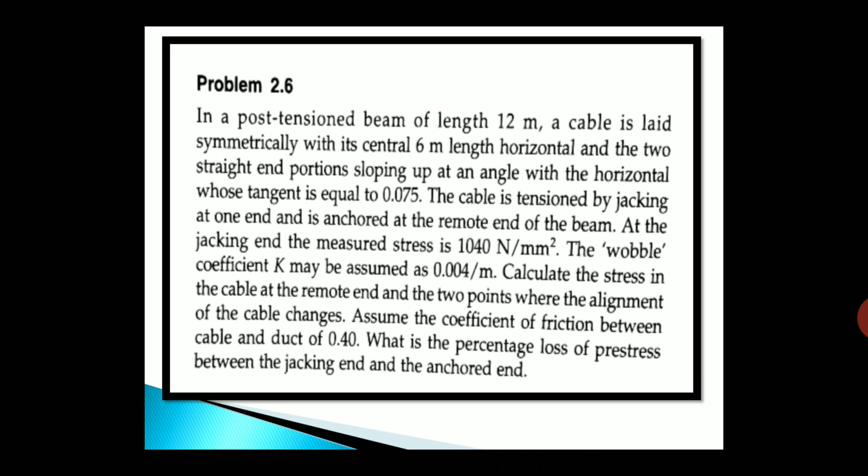Okay, so we have drawn a schematic diagram. The total length is 12 meters. The central 6-meter portion is flat, that is BC, and AB and CD are the inclined portions. Let us say that end A is the end where jacking is done and end D is the far end. So we have to move from A towards D, that is portions AB, BC, CD. Let's start writing down the given data. Slope is 0.075, K value is given as 0.004, stress at the jacking end A, which is also the initial applied stress, P0 is equal to 1040 Newton per mm square.

So now let us analyze this example part by part. The first part under consideration is AB, which is sloping. At end A we are applying the initial stress 1040. As we move from A to D, we have to find what losses take place. So firstly, the loss of stress between AB can be obtained by the formula P0 into bracket mu alpha plus Kx, where P0 is the initial stress, mu value is given, into alpha 0.075, plus 0.004, which is the K value, into 3. Here x is equal to 3 because we are taking the first span AB, which is 3 meters.

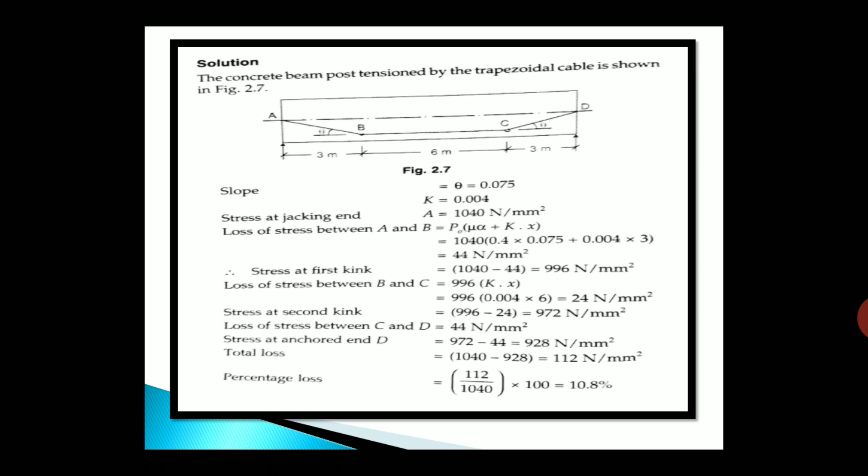Okay, so this was a bit different example where we had to calculate the loss at each point, and finally we got the loss at the farthest end, that is point D. This is a very simple example actually, but you need to understand the given data and the problem properly.

So again, next example, which is an easier one. Here we have a beam which is 300 by 600. The area of steel is given as 250 mm square and located at a constant eccentricity of 100 mm. That means the cables are straight. Initial prestress is given as 1050 Newton per mm square and span is 10.5. We need to compute the losses using the given data.

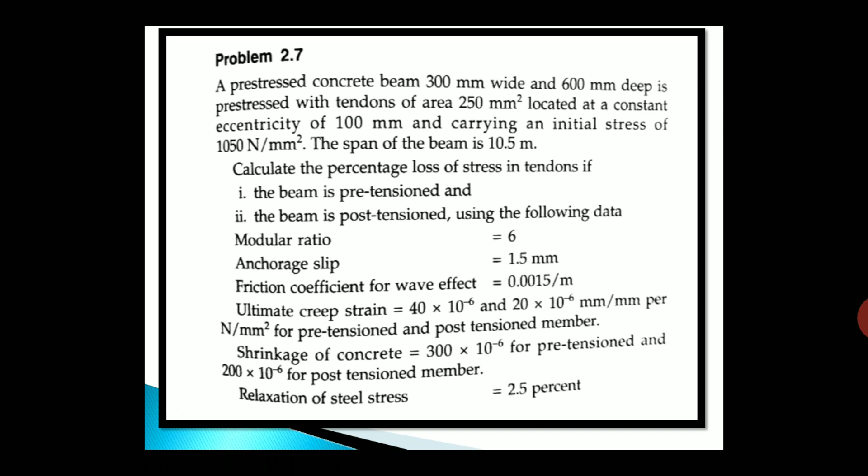First case, the beam is pre-tensioned; second case, the beam is post-tensioned. So this is a very good example. If you become perfect with this example, you will be able to solve all the losses, because here maximum of the losses for both pre-tensioned as well as post-tensioned are covered in this example. So the required data is given. So let's come to the solution.

Firstly, as stress is given, let us calculate the prestressing force, that is stress into the area of steel. So guys, don't make a mistake here, don't take concrete area, because the stress is related with steel only. Prestress is applied in steel, not in concrete. So P is equal to 1050 into area of steel, which is given. We get an answer of

262,500 Newton. Then area of the section, or if you want you can name this as AC, that is area of concrete, 300 by 600, which comes out to be 180000 mm square. Then next, modular ratio is 6. So taking this data, we can go for the calculations. So I value is calculated.

Next, first step of our calculation will be calculation of FC, that is stress in concrete at the level of steel. We know the formula, that is P by A plus P into e by I multiplied by e again. So substituting all the values, we get the stress in concrete at the level of steel, that is FC, or sigma c, is equal to 1.944 Newton per mm square.

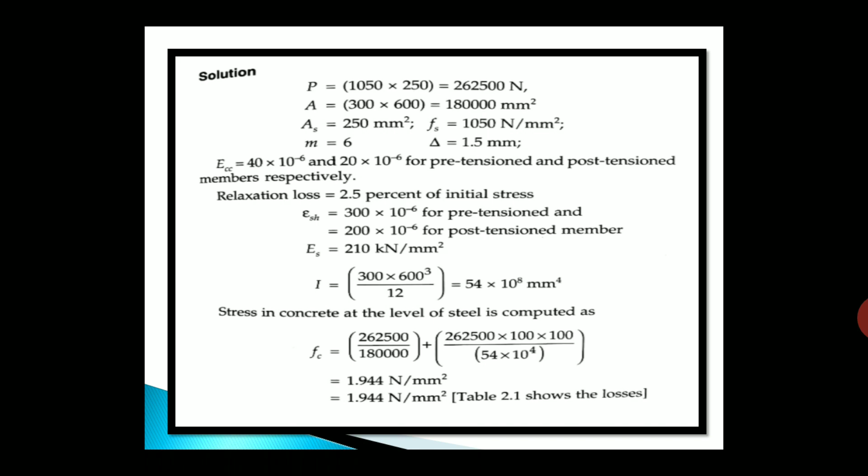Now let's compute the losses. Here the losses are given in the table format, which becomes very easy for calculation. So first loss is elastic deformation. Nicely the equation is also written, that is m into Fc, which is modular ratio into Fc. So for pre-tensioned it is 6 into Fc, which we have calculated as 1.944. Hence we get the loss as 11.664.

In case of post-tensioned, as they have not mentioned number of tendons and whether they are stressed individually or simultaneously, we'll assume that a single tendon is stretched, so there are no issues of any losses due to elastic deformation, hence it is nil. Second case, relaxation is given as 2.5%, which is for both pre as well as post tension. So therefore 2.5% of initial applied stress, that is 2.5% of 1050, which comes out to be 26.25 Newton per mm square in both the cases.

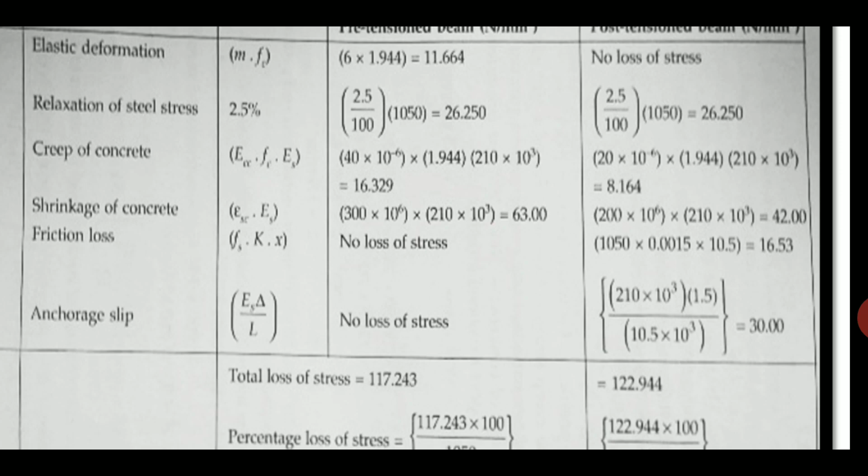Next, creep loss. Creep coefficient is given, which can be used. Only thing to note is in pre-tension and post-tension values are differently mentioned, so don't make a mistake. One is 40 into 10 raised to minus 6, whereas other is 20 into 10 raised to minus 6. Multiplied by the stress in concrete which we found out, 1.944, into Es. So this is a very easy calculation. You get the answers for loss due to creep of concrete.

Then comes loss due to shrinkage. Again the factors are different. Epsilon s is different in both the cases. One is 300 into 10 raised to minus 6, other is 200 into 10 raised to minus 6. So epsilon sc multiplied by elasticity of steel gives you the shrinkage losses in concrete, both in pre-tension as well as post-tension.

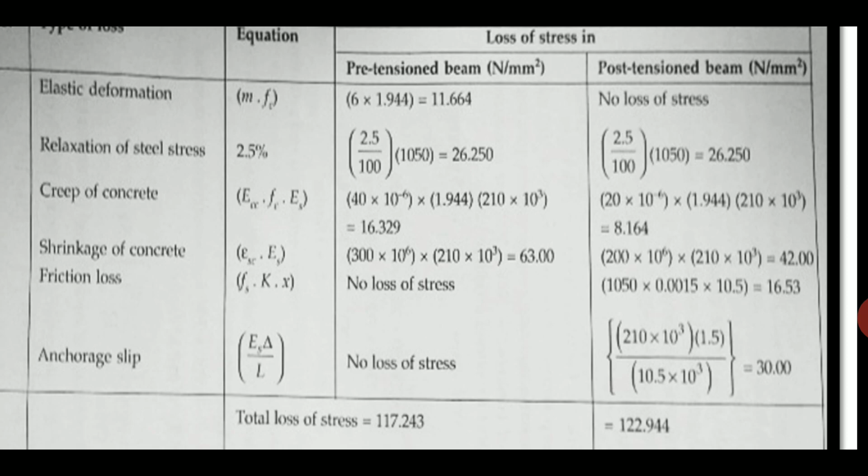Friction loss. In pre-tension there is no friction loss, whereas in post-tension we get the friction loss by our formula Fs into K into X. So Fs is the initial stress, into K value given as 0.0015, into X, which is the entire length of the beam. Then next we are finding loss due to anchorage slip, which is not occurring in pre-tension members, and in post-tension members it is given by Es into delta by L, where delta is the slip which is given data. It comes out to be 30.

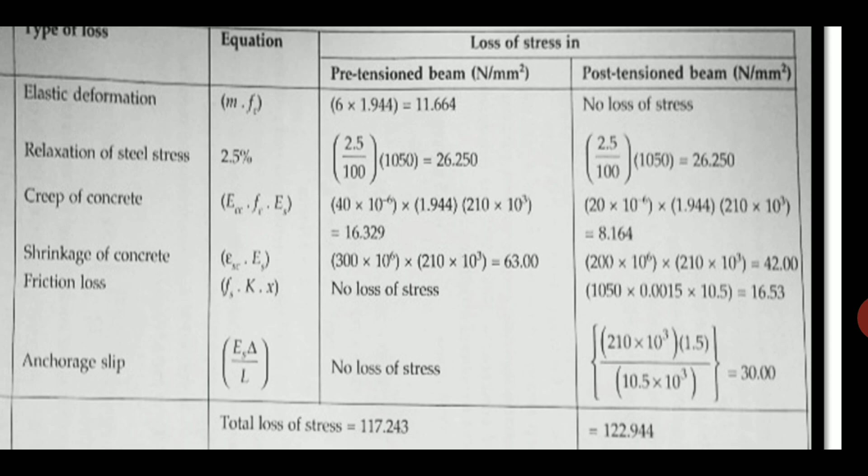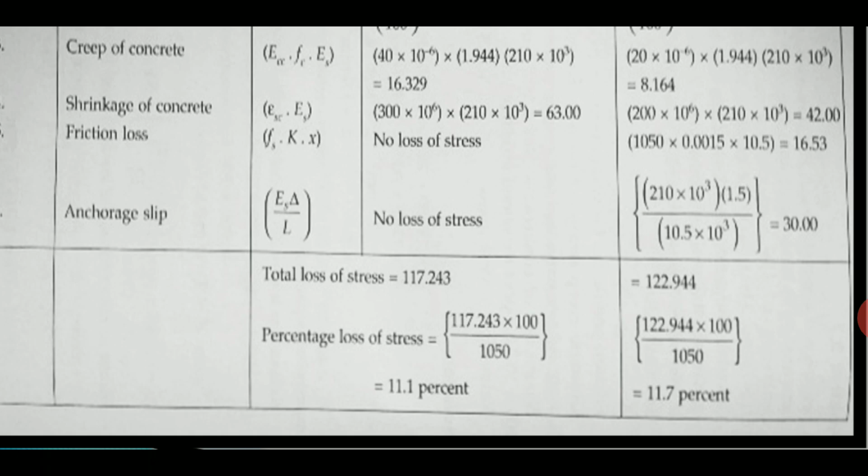So when we add up all, in pre-tension case we are getting the total losses as 117.243, whereas in post-tension we are getting the losses as 122.944. Hence we can calculate the percentage, that is the loss divided by original stress into 100. We find that in pre-tension beam the loss is 11.1%, whereas in post-tension the loss is 11.7%. So approximately, for this given data, as the span is up to 10 meters, the losses are nearly remaining the same.

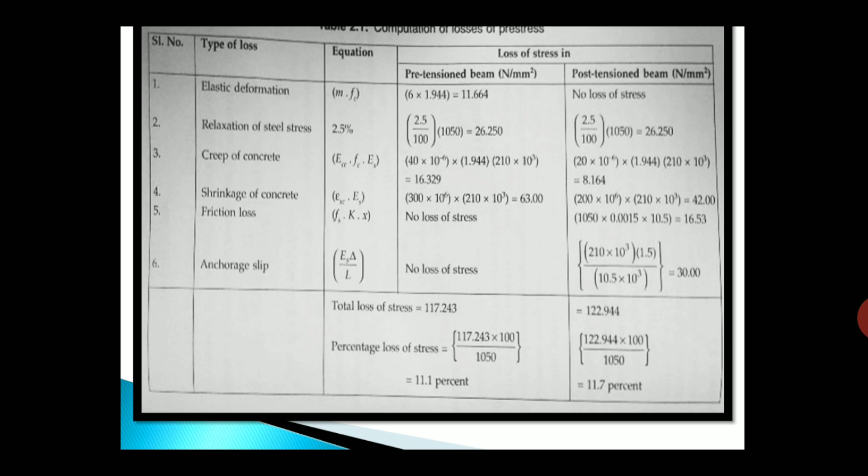So this is your second example. So again I am stressing that this example is very easy, and this gives you the entire picture of all the losses, both in case of pre-tensioned as well as post-tensioned members.

Let's come to the last example of the day. I have selected this example because again something different is there in this. Okay, here we have a concrete beam AB of 20 meters, which is post-tensioned and carries an initial stress of 1000 Newton per mm square at the jacking end A.

The cable is parabolic between the supports AB and is concentric at the supports with an eccentricity of 400 at the center span. The coefficient of friction between the duct and the cable is given as 0.35, and wave effect coefficient is given as 0.15 for 100 meters. Now see the given data, directly you cannot take 0.15, it is 0.15 per 100 meters. Therefore for 1 meter, how much?

0.15 divided by 100. So here there is a possibility of you all making a mistake. You will take the coefficient directly as 0.15, but it should not be done because 0.15 is for a span of 100 meters. Therefore for 1 meter, the wave effect coefficient will be 0.15 divided by 100, which is 0.0015.

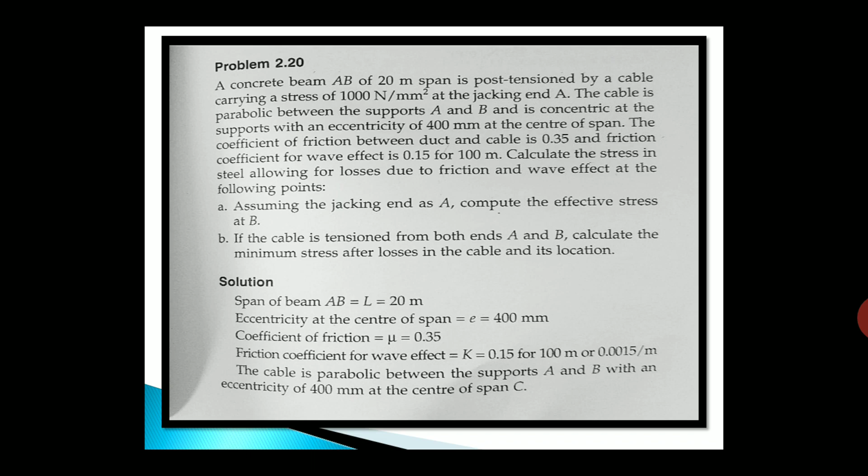So we have to calculate the stress allowing for losses due to friction and wave effect at the following points. Assuming jacking end is A, compute the effective stress at B. If the cable is tensioned from both ends A and B, calculate the minimum stress after losses in the cable and its location. Okay, so it's a nice example. So let's start with it. Note down the given data properly.

So now firstly let us come to the slope of the cable. For first case, as it is jacked at only one end, we get the slope as 4e by L, which comes out to be 0.08. Therefore the angle, as it is jacked at one end itself, is 2 times the slope, which comes out as 0.16 radians. So now let's put in the formula for friction, that is P naught into bracket mu alpha plus Kx.

Now case 1, the loss of prestress between A and B, that is we want to find the stress at end point B. Here anchorage is done at only one end, hence entire length is taken as x, that is x is equal to L is equal to 20 meters. Therefore substituting in the friction formula, P naught is 1000, which is the given stress, substituting value of mu, the value of alpha, that is 2 times of slope, because jacking is done at one end only, we get the answer as 59 Newton per mm square.

Therefore when it is a single jacking system at point A, we find that the stress which is lost is 59 Newton per mm square. Therefore effective stress at B will be applied stress 1000 minus 59, which is the loss, which is equal to 941 Newton per mm square. That means as we reach the end B, the loss happening is 59, and hence the stress at point B is 941 Newton per mm square.